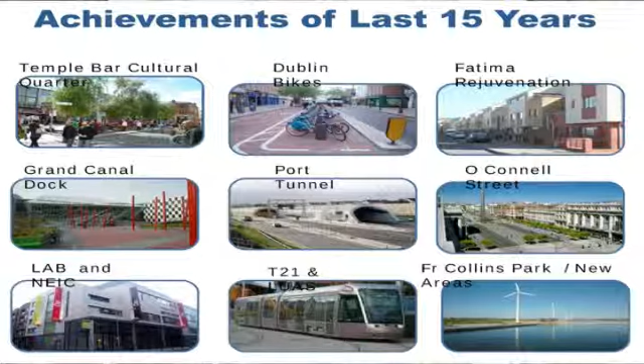Over the last 15 years, our Celtic Tiger is gone, God bless him or her, but they've left behind a pretty good legacy. You look at things like Temple Bar, the Grand Canal Dock development, the Port Tunnel, rejuvenation of O'Connell Street, Fatima Mansion. So the legacy of the Celtic Tiger is good.

That's how we hope now to rebuild our national economy. If you look back on those years, there are now people living in the city - in the 70s and 80s there was mass migration out of the city into the suburbs. We're fostering a smart economy, and I'll touch on that later, particularly investing in infrastructure for the city.

Among other things, we're developing a good cruise tourism business. Last year about 97 cruise liners came to Dublin, so that's a growing business. But most of all, what we like to do is welcome people to Dublin, as we were welcoming you here to our civic offices.

You'll see there the Queen, President Obama, who's got himself a new job for the next 4 years. Who's that chap in Croke Park? Anybody know? Xi Jinping. We hope he's going to get the top job in China, possibly next week or the week after, and he visited Ireland. So it's good to make sure that we're the centre of the world for a while.

Dublin is a city with a very strong cultural identity. It's a good brand, a world-class location, and what we're pitching for now is to make sure that the opportunities we have in Dublin turn themselves into jobs and a sustainable society for all of you to grow up in.

The economic action plan for Dublin is very simple. It's built on 3 things: creative people, a vibrant place, and strong leadership, mixing those 3 themes together. The Creative Dublin Alliance is local government, universities, business, the creative industries and state agencies, pooling all of our resources together.

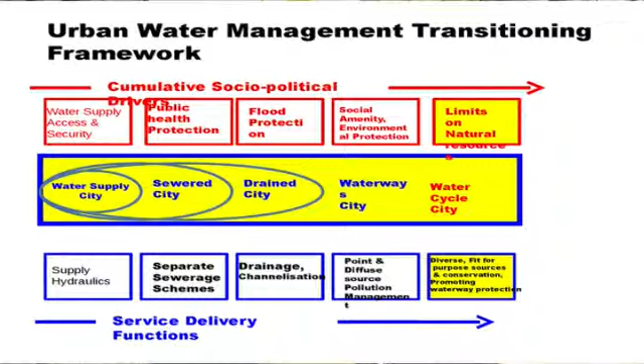Moving on from that, we're looking to the future - a waterway city. That's when you're trying to integrate social amenity with environmental protection. Then you look at the water cycle city, looking at the fact that there are finite limits on the amount of water we have to work with. So how can we work within a finite capacity?

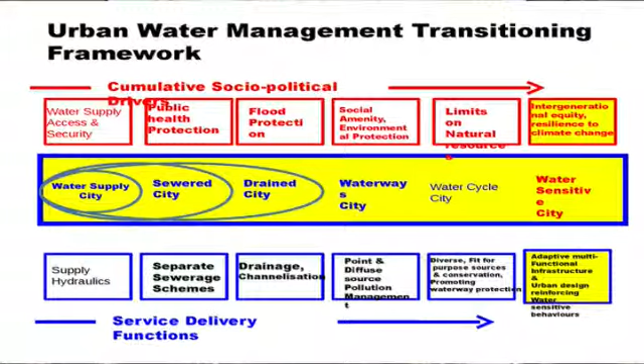Then looking at, I suppose, the ultimate goal, which is what I call a water-sensitive city. Among other things, you're trying to deal with difficult concepts like intergenerational equity. What that means in simple terms is, I'm not going to do something today that's going to compromise your options and opportunities for the future. So that, I suppose, is the structure.

And I'm going to centre my talk on the first three: water supply, the sewered city, and then the drained city.

Just to start off, we have a series of linked strategies covering our drinking water, wastewater, and stormwater, and probably the most important thing to look at is that they're projected very far into the future - at least 40 to 50 years into the future with our planning processes.

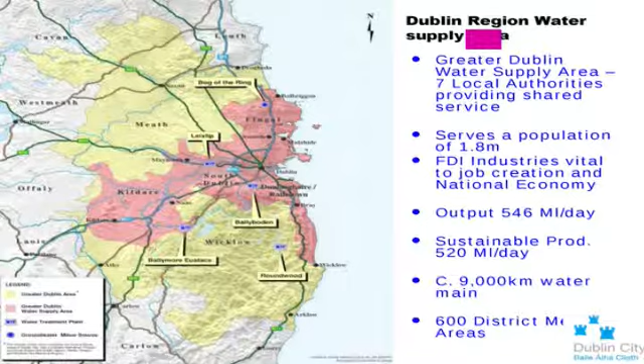The Dublin water supply area involves 7 local authorities working together. We output every day 546 million litres of drinking water, and we've about 9,000 kilometres of water main throughout the Dublin region. So it's a pretty large network that we have to manage on a daily basis.

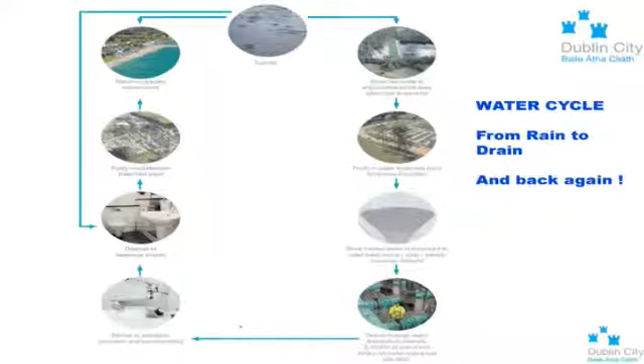We then have to store it in intermediate storage reservoirs, like water towers - there's one up on the M50 if you ever drive around the Ballymun area. We distribute it through a network of 9,000 kilometres until we deliver it to the customer - that's all of you. You, I'm afraid, return it to us in a most disgusting condition, going down the plug hole in the toilets. We then have to clean it up again before we return it into the sea. So that is the rain cycle all over.

If you look at what we're trying to do to develop that, well, we're working on 5 parallel action lines: demand management, developing new sources, new infrastructure, rehabilitating our old assets, and then focusing on leakage control - dealing with leaks within the network.

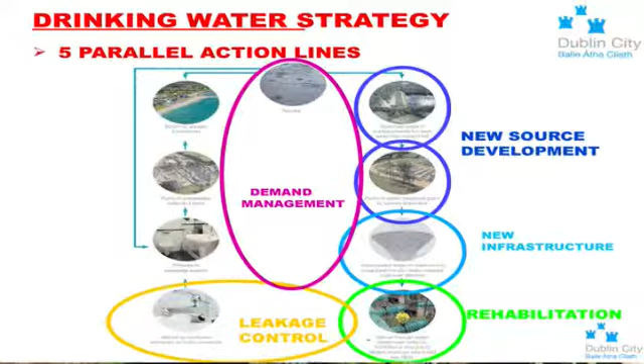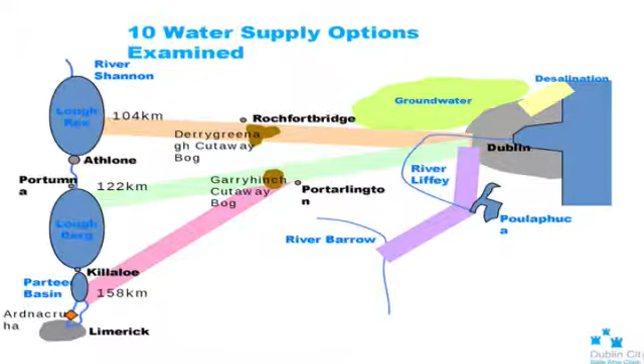In terms of the future, we know that within the next 8 years we need a new water supply for Dublin - the existing ones will still be with us, but we need to top it up. We looked in the recent past at 10 water supply options, everything from desalination, in other words piped seawater, to groundwater, to options involving the River Shannon. And when we looked at that, the benefiting local authorities is not just the greater Dublin region, but about 14 counties in Ireland, so it's a national project.

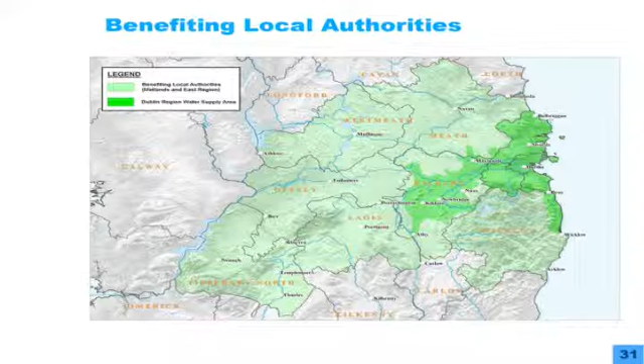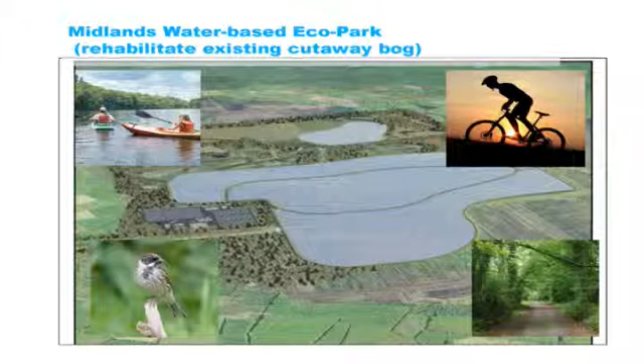The recommended option after all of those studies was centred first of all on developing a Midlands storage facility and water-based eco-park. The intention behind this is to have a storage reservoir in the middle, and the outer ones are environmental cells, with the water treatment plant down there. It's a 1,400-acre site - it's a cutaway bog. If you've never heard that term, the bog is gone, you're down to bedrock, so that area has to be rehabilitated.

On the day that it opens, that will hold 4 months' drinking water supply for the Dublin region.

When it is fully developed, it will be down to 2 months. And if we find that we need to further develop that, because with climate change we may not know everything that's going to happen in the future, by 2040 there's another cutaway bog there that will hold another 4 months storage should we need it.

So we've climate change proofed this as far as we possibly can into the future. I suppose the model is based on, there are many models you could build it on, but the model we chose is the Rutland Water model. It's Rutland Water over in the UK. Best way of describing it is it's in the middle of nowhere, a most picturesque area, but it attracts 1 million visitors a year.

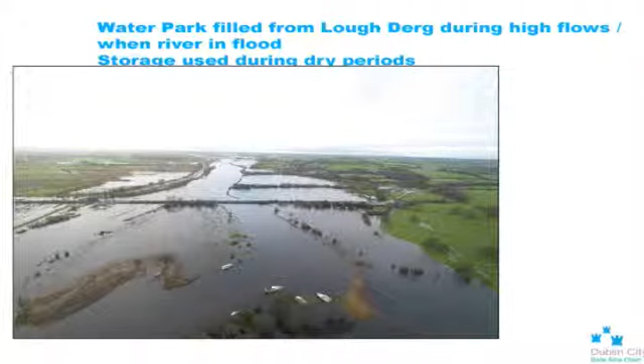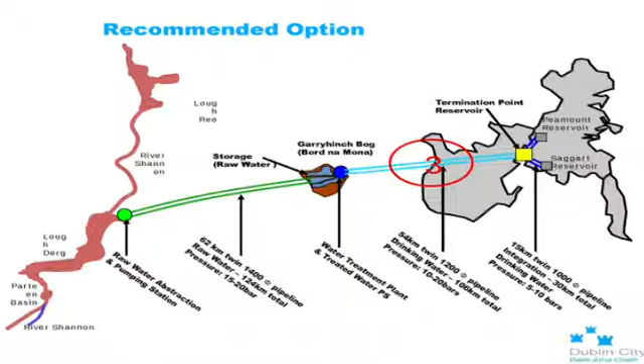So not only developing a water opportunity, but also a sustainable tourism opportunity as well. The intention is that that storage facility will be filled from Lough Derg when we have high and flood flows in the River Shannon, and then at any time when the flows in the Shannon are a little lower, we'll use the storage facility. The quantity of water we're going to take is about 2% of the average flow, so the Shannon will be absolutely unchanged by this water abstraction, and then we'll deliver it to the Dublin region.

Why are we doing this? Well, I suppose population growth is one thing, but if we look at the moment in Ireland, just in 3 sectors at the moment, agri-food, pharmaceuticals and ICT, we have about 273,000 people working in high-quality, good-paying jobs. Within 10 years, that can grow to 457,000. So the possibility is that 150,000 high-quality jobs can be generated in the Dublin and East region and the Shannon region as a direct result of this investment. So this, as much as anything else, is your futures that we are trying to prepare for.

Conservation, absolutely essential. This is an extract from our Tap Tips website, which, if you've ever looked at it, I would recommend you might have a look at it, it gives simple, practical suggestions as to how you can save water if you're an individual, householder, or a business. We take good examples from wherever we can find them anywhere in the world, trying to conserve water and use as little as absolutely possible.

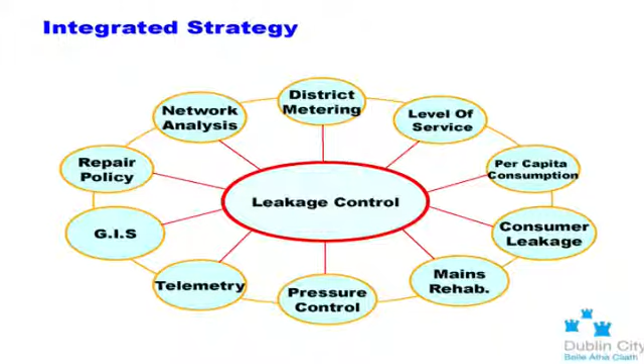Leakage control, very complicated, I could spend hours talking about this. But when I talk about managing leaks, there are really 3 types of leaks. There's big leaks - the good news about big leaks is they find you, and you're able to repair them quite quickly. There are smaller leaks, some of them are quite tiny, and we find them using people and technology, so we've invested very heavily in our people. But last of all, then, there are absolutely tiny leaks.

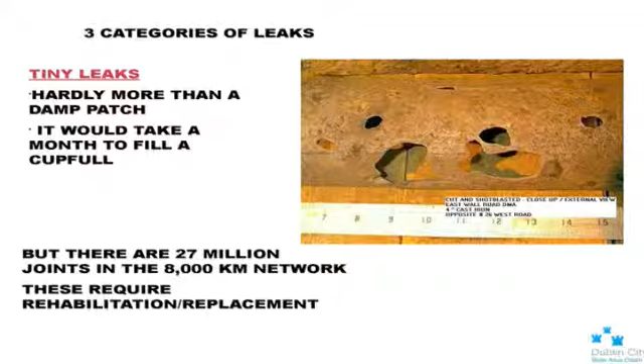This is a good example of a pipe that's 100 years old. We cleaned that one, that particular one stayed together. The first time I asked one of my crews to clean an old pipe for me, he came back with a plastic bucket with bits of metal in it, and he said, I'm afraid there was no metal left to actually clean it properly. So that's an old water main, and really that's our challenge, to replace a lot of those, and we're already doing that.

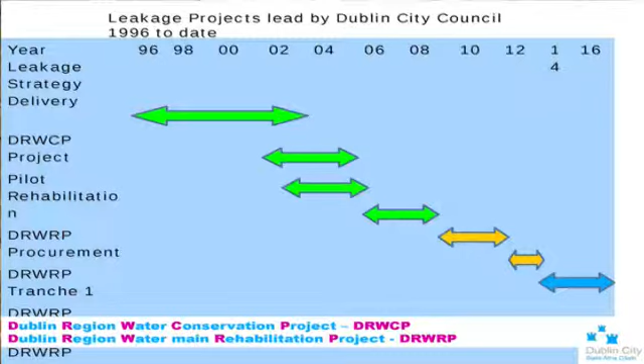We started our water conservation project back in 1996. At that stage, the leakage level in the Dublin region was 42.5%. The reason why it was 42.5% is there was no money to replace our water network. So water mains that were put down in the 1890s and 1900s, before the motor car was even developed, were still providing daily service, but were gone beyond their useful life. We're now down at 28%, and by the year 2020, we will be best compared to any water utility anywhere in the world.

Just an example, because at the moment in Ireland people don't pay directly for water, we've very little data on how people use water. And when we were replacing a lot of the network, we'd start by replacing in a small area maybe half, and we found that the unaccounted for water, which is usually leakage, was 19%. We replaced about 70% in another area, and unaccounted was 19%. And eventually we replaced 90%, and you've guessed it, unaccounted for water was 19%. So we couldn't square that. Either my people were doing a terribly poor job in replacing the water mains, or there was something that we hadn't figured out.

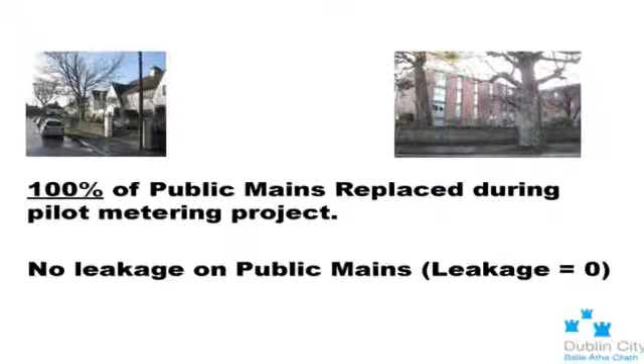So what we did is we carried out a pilot metering project near the Merrion Gates, where we replaced 100% of the old mains. And we found there was no leakage at all, but unaccounted for water was still 19%. So we put a meter on every house there, a smart meter. And what we found was truly shocking. One house, instead of using 500 litres a day, was using 35,000 litres, the same amount of water as 80 houses.

The second example used the same amount of water as 50 houses. So 3 houses were using the same amount of water as all the other houses combined in that area. There were leaks, inevitably under the front garden or driveway, never in the house, always on private property. By finding those leaks, we're able to save quite an amount of water. So if you look at universal metering that's coming down the road, this is the reason why it's coming in, in order to try to conserve water.

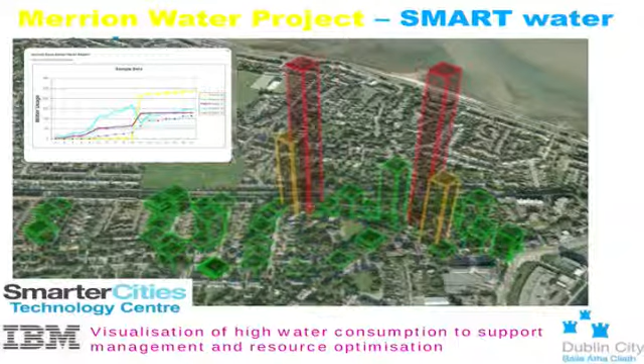This is an interesting example of a data visualization of that same area, looking at who the high water users are and presenting that data in a way which makes it easy for myself, as a manager of the network, to manage water. That's working with IBM, who've opened one of 14 smart technology centres out in Damastown, and water is one of the key themes we're working with them on.

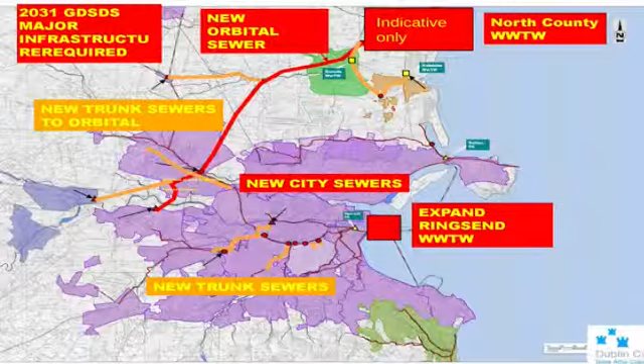If I look at drainage for a moment, our Greater Dublin Strategic Drainage Study was delivered in 2005, and it covers up to 2031 with a whole raft of policies. But in summary, what we're trying to do in drainage is expand our Ringsend wastewater treatment plant, which is underway at the moment, build new city centre sewers, because some of these are 200 years old, connect new trunk sewers, and build a new North County wastewater treatment plant. The site for that is under active consideration at the moment. Build a new orbital sewer, and then trunk sewers to connect into that. So that is the blueprint for the next 30 years for the development of Dublin.

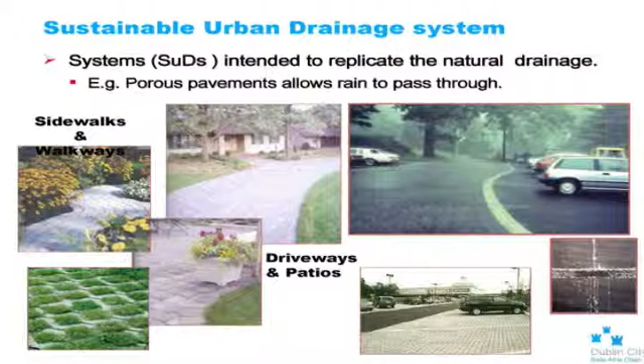Central to that is the use of what I call sustainable urban drainage systems. The intention of a sustainable system is to replicate what nature does. So rain falls and it goes into the ground, it's absorbed by the earth. You don't pipe it somewhere else and hope that it vanishes without any environmental consequences.

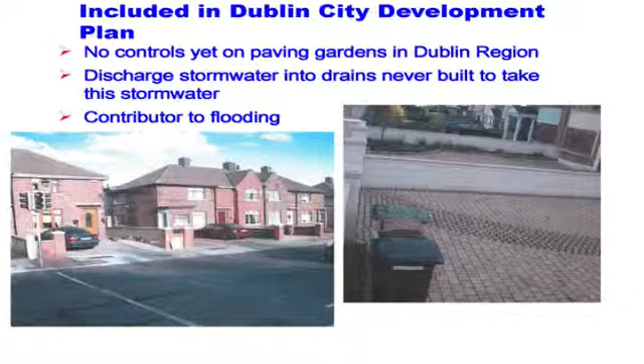At the moment, one of the big challenges we face on flooding, which I'll touch on in a moment, is driveways being paved over. That produces more water thrown out onto the road into drains that are over 100 years old, which were never built to accommodate that type of runoff.

Legislation drives an enormous amount of what we do in water resource planning and management. The EU produces what they call directives that are binding on all member states. The good news, however, is that while the outcomes are binding, how you get to those is left open. A lot of EU research programs then give us an idea of how we might get to where we want to be in an innovative way.

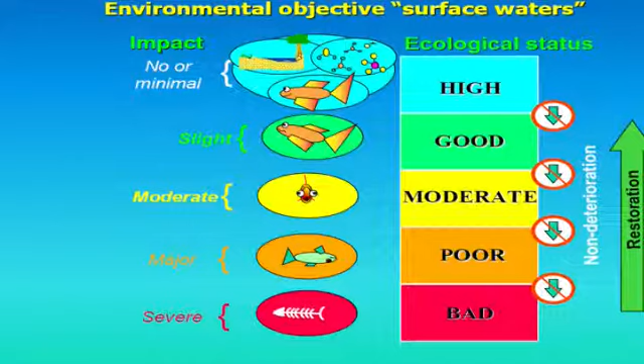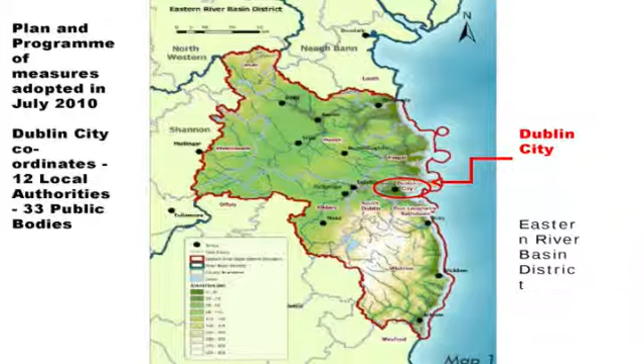This is an example under the Water Framework Directive. What we're trying to do is move from wherever we are on this graph up to either high or good ecological status. As I say, the targets are binding on all member states, but how you get to them is quite flexible. Dublin is coordinating at the moment what's called the Eastern River Basin District Project. That's 12 local authorities and 33 public bodies working together. I'll tell you, keeping all those parties pointed even roughly in the same direction is quite a challenge.

While we were hit in October 2011, Copenhagen was also flooded in July 2011. Their flooding was so intense that steel manhole covers were blown 12 foot up into the air by the pressure of water.